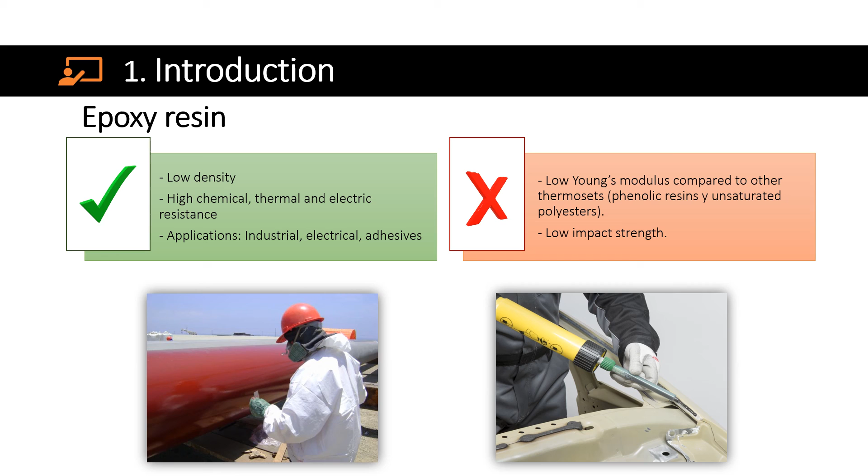Nevertheless, epoxy resins exhibit low Young's modulus compared to other thermosets like phenolic resins and unsaturated polyesters. Apart from this, they also exhibit a low impact strength. All these things limit their applications in many industrial fields. Low-cost ceramics are deemed as promising fillers in the field of polymer composites. Some micronic iron oxide-based minerals have attracted the attention of the scientific and industrial sectors due to their intrinsic magnetic properties and characteristic gamma and X-ray attenuation.

Among them, naturally occurring black beach sands, also known as ferrotitaniferous sands, composed primarily of ilmenite, raise special interest. In South America, these sands are prevalent along the coastlines of various countries, and traditionally, this type of deposits have been mostly exploited with the purpose of obtaining titanium oxides. However, the low titanium oxide recovery rate is still insufficient to justify the mining process. In Ecuador, these sands can be localized primarily along its Pacific coast with an estimated commercial value of $24 per ton and have been conventionally used only as a cement clinker additive and agro-industrial fertilizer.

Recently, these sands have been employed as a low-cost precursor for the synthesis of iron titanium oxide-based nanostructures via soft chemistry approaches. However, applications of Ecuadorian ferrotitaniferous sands without chemical treatments have still not been reported in the literature as far as we know. A previous study determined that these sands are an ilmenite-hematite solid solution. As a matter of fact, solid solutions between ilmenite and hematite both display semiconducting and ferromagnetic behavior, resulting in a non-traditional magnetic semiconductor with conceivable spintronic and ionizing radiation barrier applications.

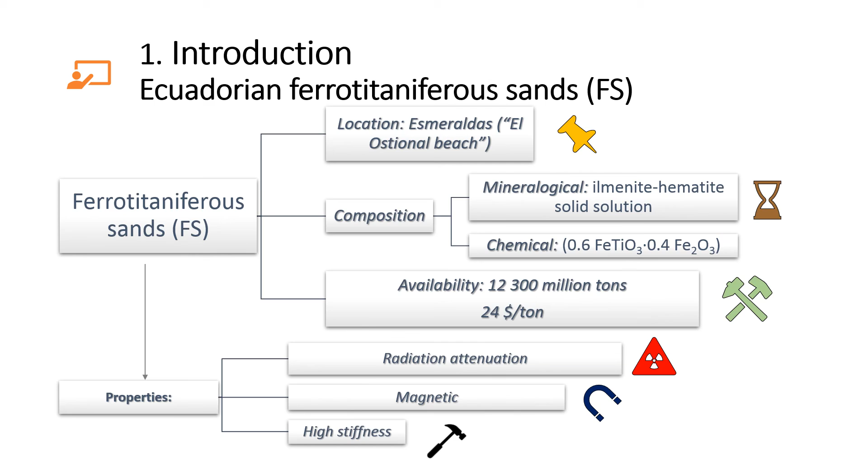Hence, this work is intended to evaluate the effects of ferrotitaniferous sands in reinforcing an epoxy resin through micro-indentation and dynamic mechanical analysis. This study is a framework for the exploration of the mechanical and thermal responses of the as-prepared composite as a valuable step towards expanding the application of the ferrotitaniferous sands in this research area.

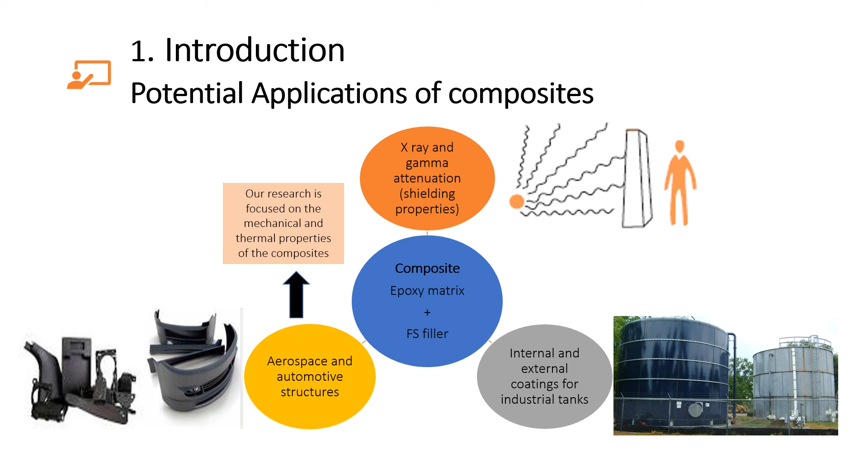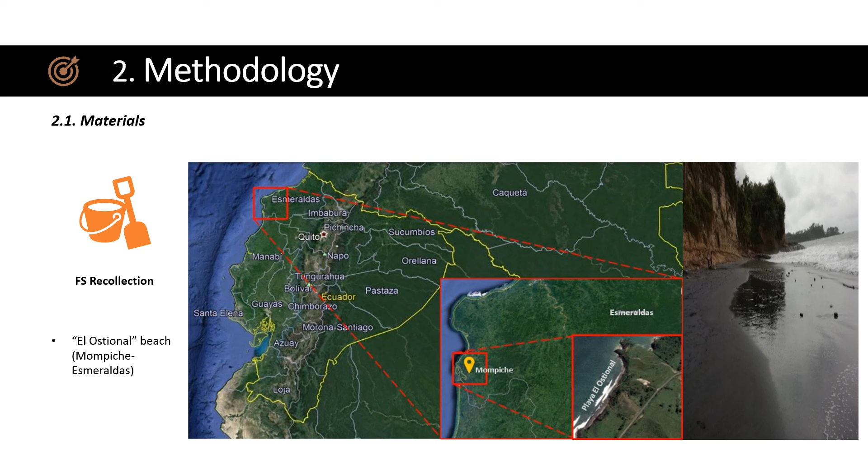For this work, Ecuadorian ferrotitaniferous sands were collected from the El Ostional Beach located in Mompiche, Esmeraldas. The collected sample was ball milled using conditions determined in a previous work, and the sand size was determined through dynamic light scattering analysis. As you can see in the SEM image, these sands present an irregular shape, so on average, the particle size is around 450 nanometers.

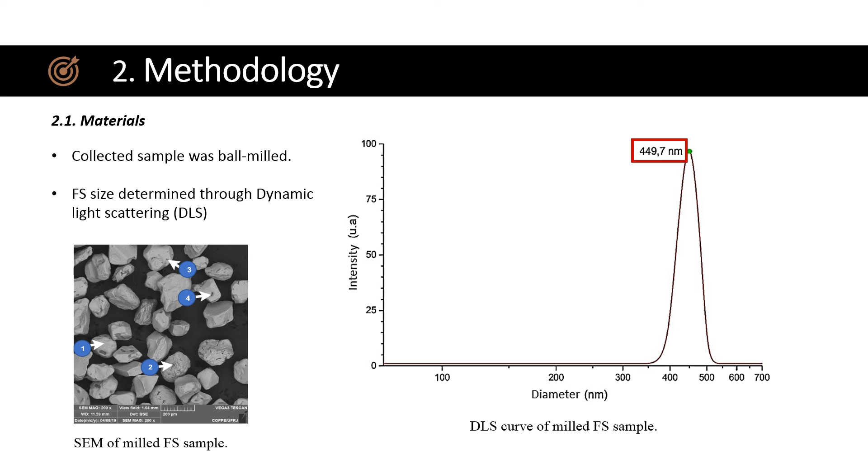The composites were obtained following the procedure shown in the following schematic. In a determined amount of epoxy resin, these sands were added. The sand contents used were 2, 4, and 6% in weight. Then, these sands were dispersed by sonication in an ice bath. Afterwards, the curing agent was added to the as-prepared dispersion and manually stirred during 10 minutes. The composites were shaped by casting in acrylic molds. Finally, the upper specimen surface was polished to improve the surface quality. The as-prepared composites were denoted as shown in the figure on the right.

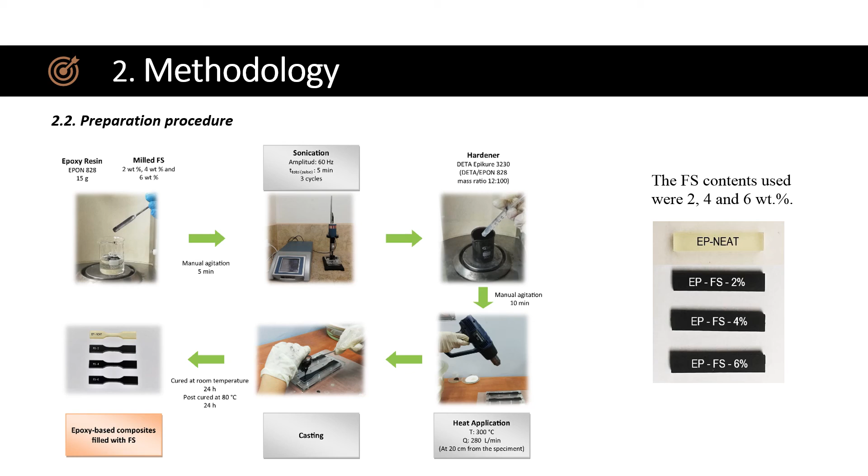The control sample and composite specimens were tested through microindentation using the conditions shown on the screen. Both the elastic modulus and hardness of these composites and sample were computed employing the Oliver-Pharr method. On the other hand, dynamic mechanical analysis was carried out to quantify the storage modulus, the loss modulus, the damping factor, and the glass transition temperature. These analyses were performed using the conditions shown on the screen.

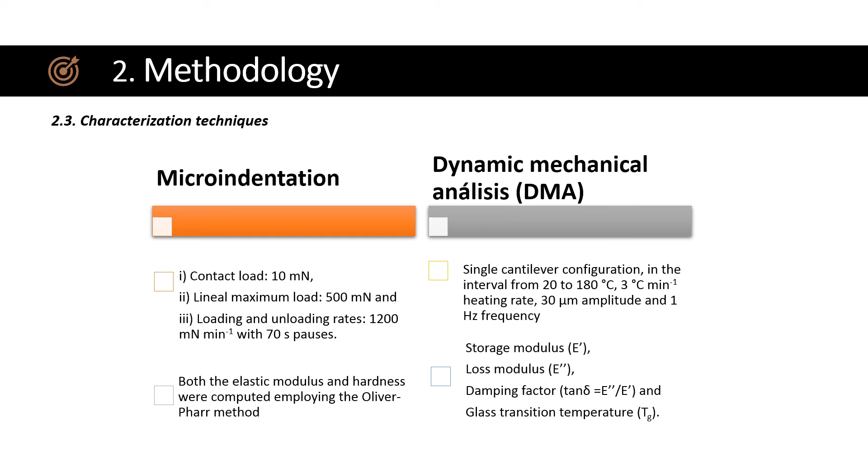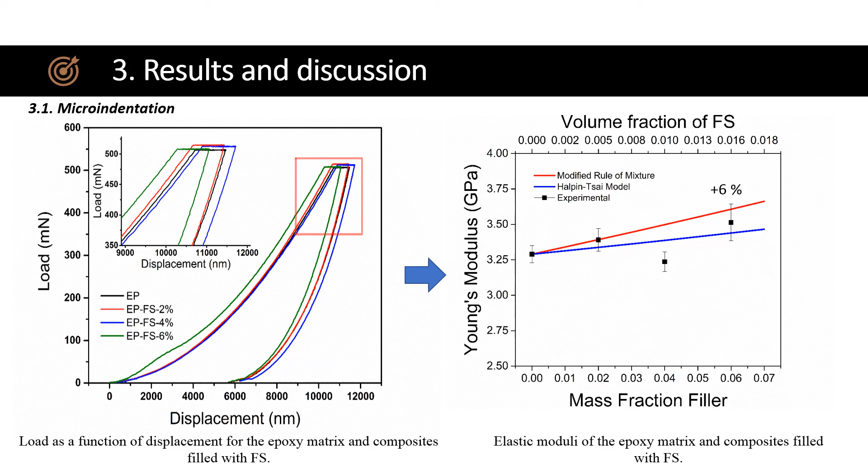Micromechanical models are used to predict the final characteristics obtained through a composite based on the properties of its constituents. The first micromechanical model used was the modified rule of mixture. This model considers a strengthening factor, which contemplates filler orientation and finite length and is best suited for particulate composites. The second model used was the Halpin-Tsai model. This model considers a shape fitting parameter, which takes shape and size of the filler into account.

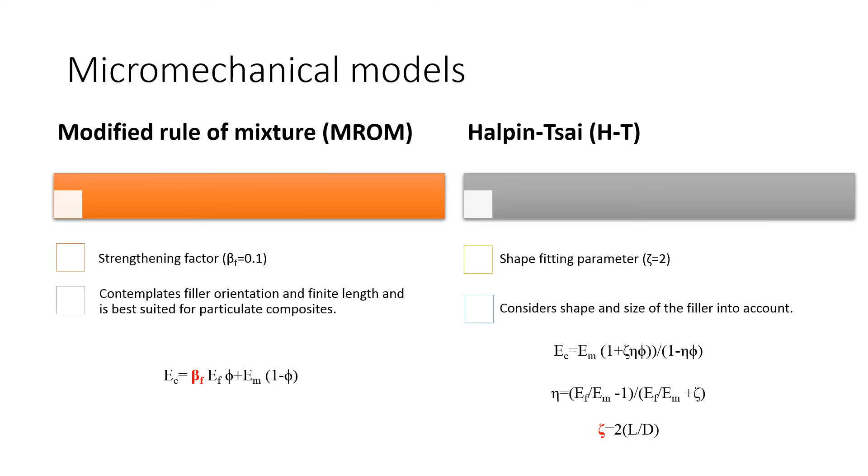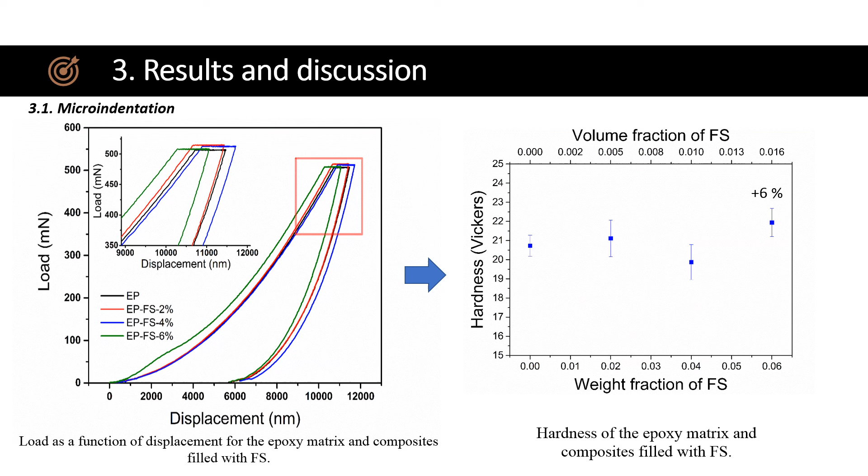Through the results obtained through microindentation, you can also determine the hardness of the as-prepared composites, as is shown in the figure to your right. You can appreciate that the composite with the highest amount of reinforcement, 6% in mass, has a 6% increase of its hardness.

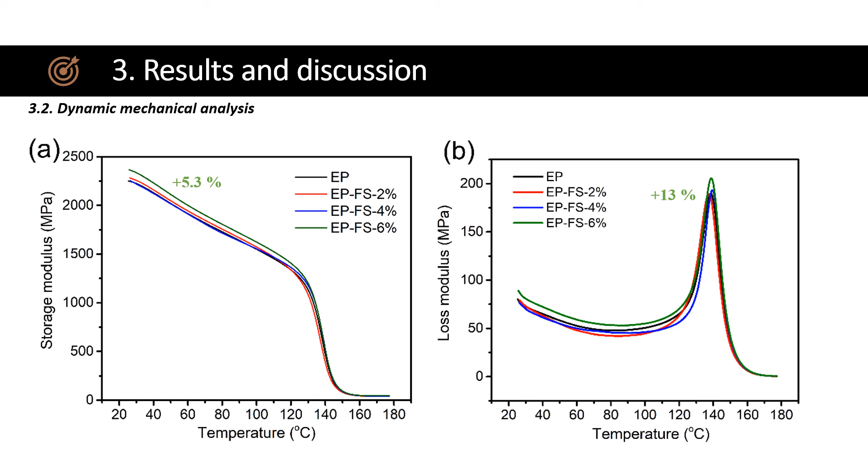Through dynamic mechanical analysis, the storage modulus, as seen in figure A, and the loss modulus, as seen in figure B, can be obtained. It is observed that for the composite with the highest amount of reinforcement, corresponding to 6% in mass of the ferrotitaniferous sands, there is an increase in storage modulus of 5.3% and in loss modulus of 13%. Also through dynamic mechanical analysis, the tan delta curve can be obtained. As you can see, the glass transition temperature of the matrix was not affected by the incorporation of the ferrotitaniferous sands. Also, the damping factor of the matrix was practically unchanged after the addition of the filler.

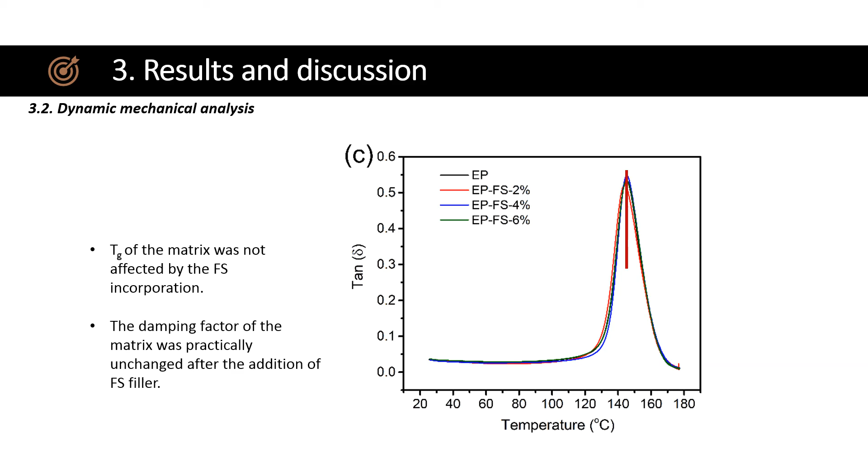Through the results that were obtained, the following final remarks can be stated. The optimum content of ferrotitaniferous sands of 6% in weight was defined by microindentation, since it allowed obtaining increases up to 6% for both Young's modulus and hardness. Both micromechanical models, the modified rule of mixture and the Halpin-Tsai models, supported the experimental results through their predictions of elastic modulus.

Finally, through DMA, it was determined that the composite with the highest amount of reinforcement, the 6% in weight of the ferrotitaniferous sands, also exhibited the highest increase in storage modulus at room temperature and glass transition temperature at around 150 degrees Celsius. Besides, the tan delta for all composites was unchanged, indicating that the vibration damping parameter was not affected by the reinforcements.